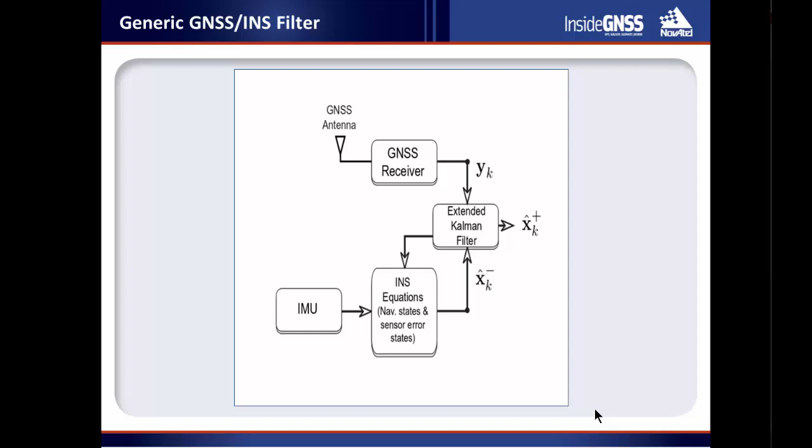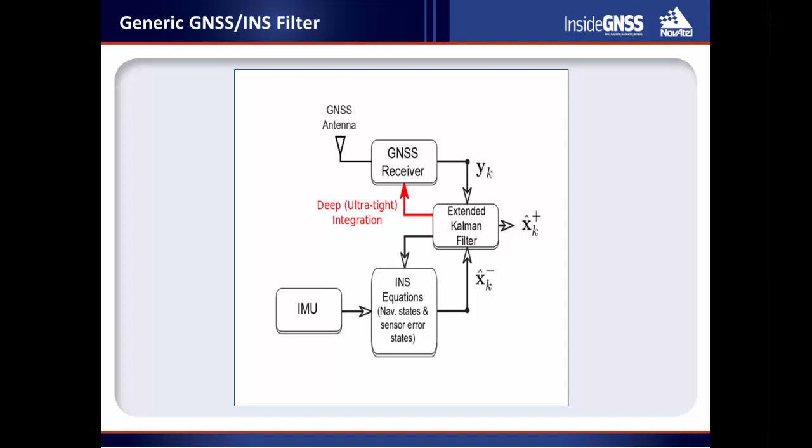And I think part of the problem why that question comes up is because we present the INS GNSS integration as shown on this slide here, where we have a block for the INS, a block for the GNSS, and some sort of a filter that blends them together. And it almost always looks the same. Sometimes there might be a slight variation where we have deep integration where the GNSS receiver is being aided by the filter outputs. But again, this kind of leads to the impression that all integration strategies are more or less the same for different applications. The fact of the matter, they aren't.

And what we're going to do in today's webinar is actually walk you through 2 case studies where you'll get to see the beginning to end process of designing an INS GNSS system. And you will get to see how the design requirements evolve and how they are different for different applications. The first one will be a GNSS integrated with a tactical grade inertial sensor for a high dynamic application. And the second one is going to be a GNSS integrated with a consumer or automotive grade or low quality

inertial sensor. And as we go through this webinar, what we hope you get out of this is to understand how the design and integration architectures and the design process are different for the different types of sensors used and different types of applications.

With that, I will go ahead and introduce our first panelist, Thomas Jekyll, who is a senior engineer in Honeywell's Sensing, Guidance, and Navigation Center of Excellence. He holds BS and MS degrees in aerospace engineering and mechanics from the University of Minnesota. Tom Jekyll's research interests lie in the area of inertial navigation, GNSS inertial fusion, and MEMS inertial sensor design for navigation applications. He has been involved in a wide range of navigation programs within Honeywell, from deeply integrated tactical navigation systems to safety critical GPS landing systems. With that, Tom, I'll hand it over to you.

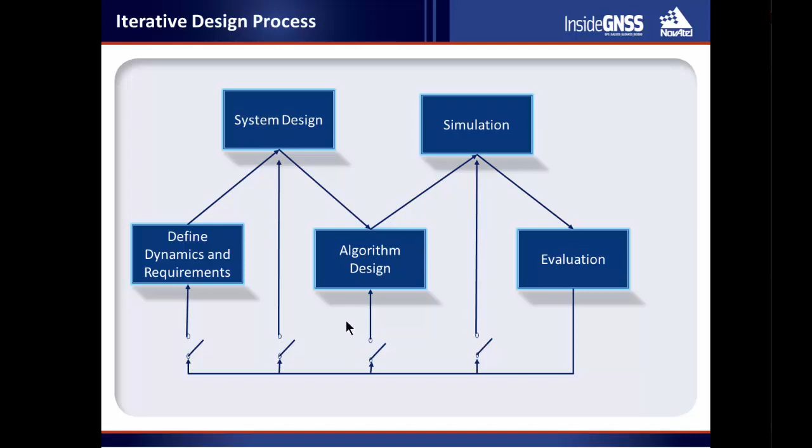So as indicated in the poll question by the majority of users, you can see that we have an iterative process here. So our goal is to define the dynamics and requirements, perform a system design, followed by an algorithm design, simulation, evaluation, and then feedback. And this feedback is especially important in designing navigation systems for high dynamic applications, since the performance is dependent on the actual dynamics involved. And I'll show that with a simple example for the inertial sensor selected for this design.

So first step, define your dynamics. You want to pick a representative trajectory or several representative trajectories, figure out the inertial forces, and since the example I'm talking about today is confined to strap-down navigation, it means sensors experience the full motion of the body with some attenuation due to how they're mounted, say by an isolator or otherwise, which is different than gimbaled navigation where the body is free to move.

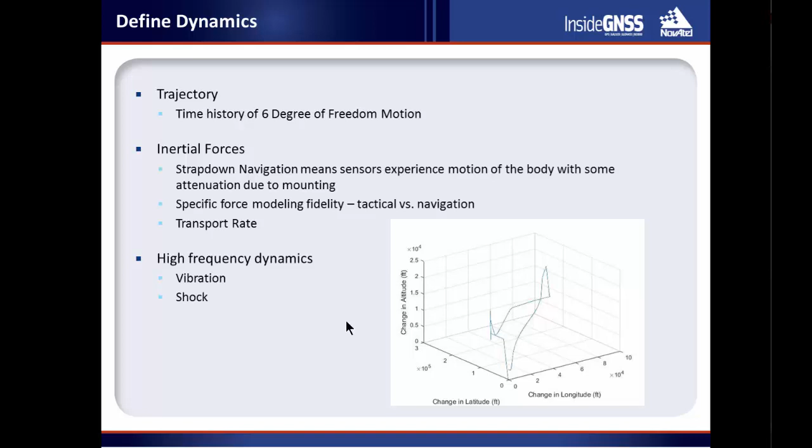And I'll talk about strap-down navigation specific force modeling fidelity. It's critical for navigation applications, but as you'll see in my error models, not so much in tactical, although it is something we still do consider. And since it's a high dynamic application, we also have to look at mechanizing the equations to include the transport rate since you're moving quickly. And other things to consider are high frequency dynamics such as vibration and shock. Those are considered high dynamics, and they do put the system under a certain amount of stress. So there are certainly requirements around surviving those.

So requirements: size, weight, power, and cost. In a lot of aerospace applications, size and weight are really key because they cause other parts of the system to have to cut weight, and you're trying to lift them up high, fast, far. So power can also be a constraint, and cost, generally not as much, but still an important consideration, especially with today's budget constraints that are going on.

And of course, given it's a high dynamic application, you want the dynamic range and bandwidth driven by your platform dynamics. So after you figure out your trajectories, you don't want to have the sensors not measuring the full bandwidth or the full dynamic range. So those are key requirements.

And then for performance, generally you first start off with navigation performance or something that's a little bit more easily quantifiable. The errors will be the focus of the first part of my talk. Work that into what are your actual inertial performance requirements and your measurement performance requirements given your trajectory and some tools that I'll discuss. And then of course there's always other considerations: reliability, technology readiness, and ease of adoption.

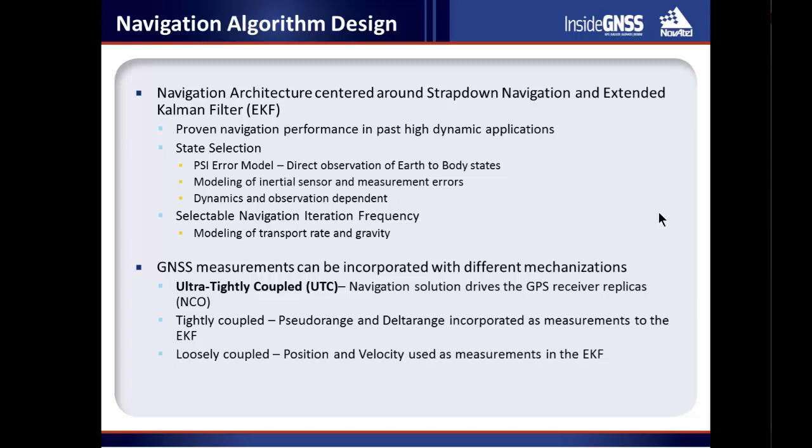So now we'll talk about one of the drawbacks of deeply integrated or ultra tightly coupled that can be overcome with a specific receiver design. These are really requirements around a receiver used for this type of application. It has to be able to accept NCO commands from external sources and output I's and Q's at 50 hertz or greater, and that is for signals with navigation data on them. Newer signals coming online without nav data should relax this requirement.

And the bias estimation and whatever corrections are made in the GNSS receiver should be consistent with what's going on in the Kalman filter, since when you go with a DI or UTC application, you combine everything into one filter, and anything else done in the receiver should be known in the central processor. Another requirement for us is small size, weight, and power. If we selected the small IMU and then put on a huge GPS receiver, that's going to be an issue. It kind of negates our reason for selection in the first place.

And then the next requirement is oscillator stability under dynamic conditions. So the oscillator G sensitivity should be at least consistent so that it can be estimated. As I mentioned before, the receiver only needs to track errors in the inertial solution and, of course, its own clock. And the signal acquisition time may or may not be critical, and I'll discuss that later with some performance results. That really depends on your requirements post initialization.

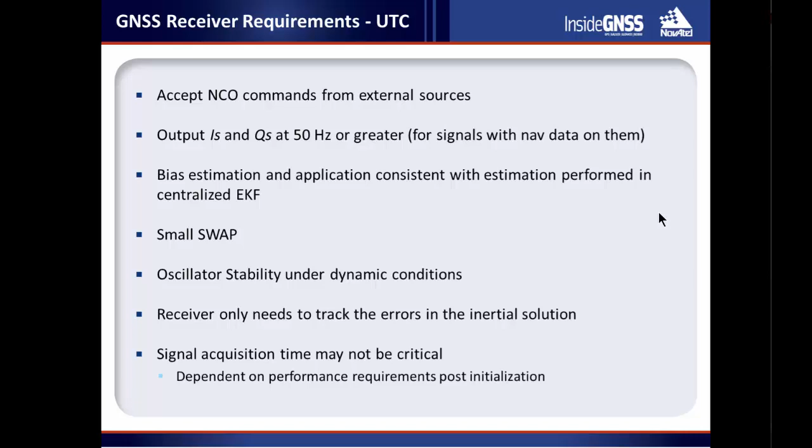So now I'll talk about, we have the INS, we have the GPS now, and we have the mechanization to bring them together. Now, specifics of how you select certain states in your extended Kalman filter. People generally use a covariance or a time domain simulation, and initially, before we really know what the algorithm design is going to be, start off with a covariance simulation.

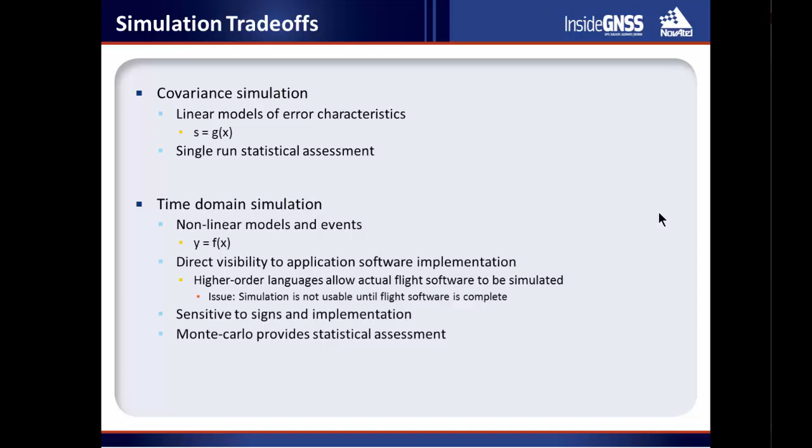That is, you have linear models of error characteristics and a single run statistical assessment, as compared to a time domain simulation where you are simulating your full algorithm, you're running it through, say, a Monte Carlo analysis and getting a statistical assessment, which takes longer for a given extended Kalman filter design. So the first thing we generally do is covariance analysis.

And so what you do is a covariance analysis, and really what you're getting out of this is the difference between a really high order filter with everything that you think should be included in the error model and candidate filters. So you're trying to select states that are going to be both observable with your measurements and observable by your dynamics.

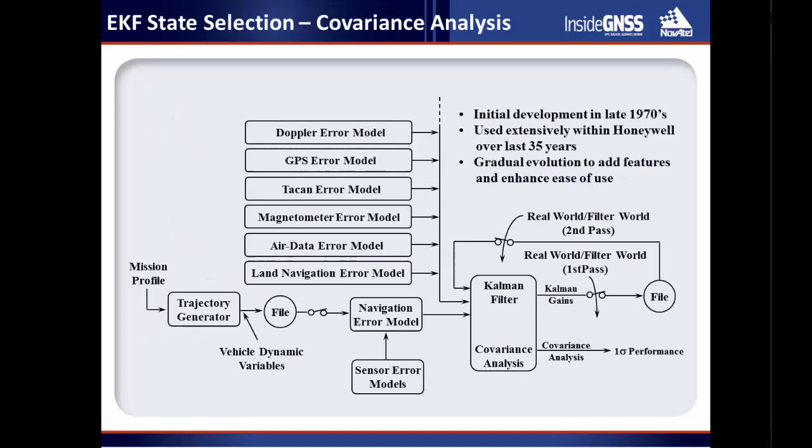So now I'll take you into a high dynamic environment, say an example of estimating a state. So the gyroscope scale factor is a common state that needs to be estimated in these high dynamic environments, and I'm going to visit the case where you do a 180-degree roll, like that aircraft rolling over on the introductory slide. So if there's no state in the extended Kalman filter, and you have a scale factor from our specification of 1,000 ppm for the AA50. So if we go back up for our HG1930 AA50, you'll see that the scale factor repeatability 1 sigma is 1,000 ppm.

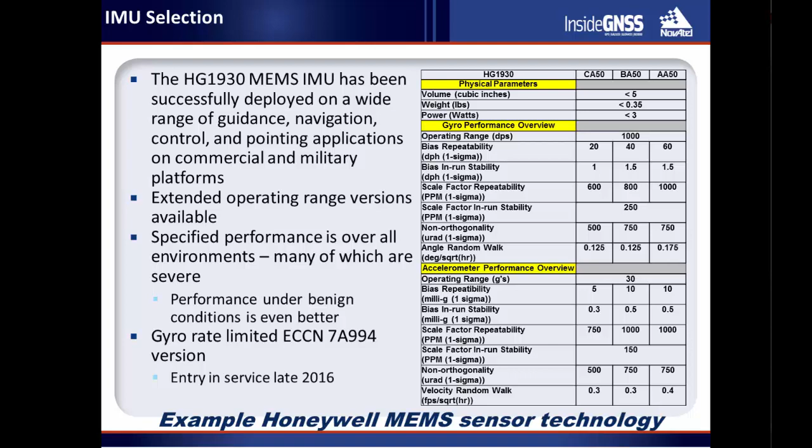Then you're going to get an attitude error for that roll of 0.18 degrees because you've rolled over 180 degrees, and you have this error in parts that causes that attitude error. Now, because of that, you're going to misresolve velocity for dead reckoning, so you're going to get this much error in your solution.

Now let's say you've estimated the state in your extended Kalman filter, and generally you can estimate to a little bit better than the in-run stability depending on dynamics. So you can estimate to the in-run from the AA50 spec, and the in-run is 250 ppm, so your attitude error becomes 0.05 degrees, and your misresolution of velocity for your dead reckoning becomes much, much smaller. So modeling that error really provides performance benefit when you are going to do these maneuvers consistently. And of note is you have to have the trajectory to allow it and the measurements to allow it.

So now I'm going to cover some more available states. Obviously, inertial states, you can model the bias of the sensors, the scale factor, as I just mentioned, any scale factor nonlinearity that's repeatable for the sensor, misalignment, non-orthogonality, and gyroscope G sensitivity, and some GNSS measurement states, clock drift rate, range bias, and oscillator G sensitivity. And of course, these states have to be repeatable and modeled as close to the real system as possible.

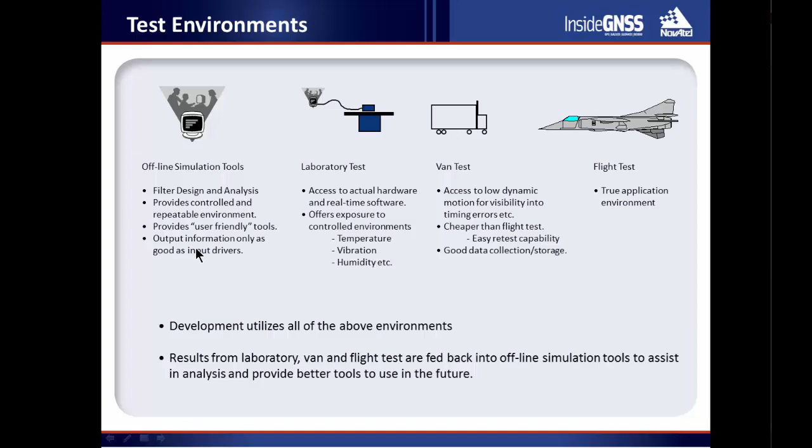And of course, when we get into a flight test, the reason you've designed your system so small is it's space constrained for the actual environment it will be in. So adding any other instrumentation takes money and time, so it's good if you've checked it out in the van test ahead of time. Then you take all that information you've learned from these tests and feed it back into your offline simulation tools to make a more complete model of your system.

And so I talked about the process, and now we'll talk about kind of the outcome of our design, and it's the HG1930N integrated navigator product. You can see it has the same form factor as a 1930. You can see it compared to a quarter here, and it's a drop-in replacement for any 1930 that exists. And the key here is flexible I/O options.

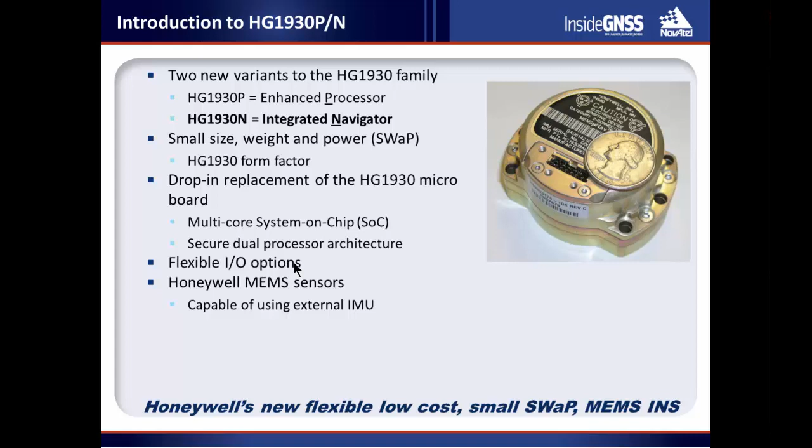So I talked about UTC and the need for feedback to the GPS receiver. So this has low latency ports. It's also capable of handling external IMUs. So if we get a system in that needs more performance, we can design to that. So what you can see in the system is the Honeywell IMU software, all the calibration, all the stuff necessary to get it to those performance requirements is running on one of the processors.

Then optionally you have the Honeywell navigation software, or it could be an external software, and it's in an open environment, and you can see it's communicating with UARTs, SDLC, and external I/O. That'll show on the next slide. So it's a 14-pin connector, and it's compatible with existing for volume, commonality, production, and cost. And so that has limitations because it's only 14 pins. There's certain systems that you want more pins to get more measurement sources, I mean, Doppler, stuff that I showed on the previous slides.

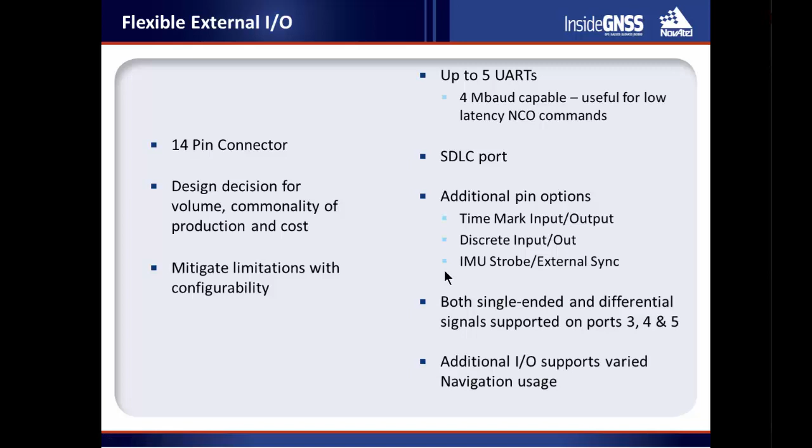So it has these ports that are configurable and capable of changing. For legacy programs, it has an SDLC port, and pin options to go to different time mark ins and outs to support different GPS receiver implementations. And so there's just various navigation usage you can use with this. So that gives us the flexibility that I talked about in the goals.

Now, system performance. So we went through the whole design, went through all the testing, and then fed it back into our simulation. So what you can see here is navigation performance is similar to the Honeywell BG1930, and I'll refer you to a reference at the end of my presentation. And so we initialize it with a certain amount of error, and we want to see that the transfer alignment measurements incorporated into the Kalman filter do their job and take it down to close to GPS level accuracy.

Obviously, the application is a UAS glider out on the wing of an aircraft that's being transfer aligned. So you have a master navigator that's providing position, velocity, and attitude updates, but you have the flexure of the wing relative to the internal bay, and then at some point the glider is going to get launched.

So you have a launch phase, and so for two different GPS receivers with a different time to first fix, you have different performance. So for the 20-second time to first fix, there's this performance. You coast free inertially there, and then at some point it recovers. And then you have a lower time to first fix, and of course the GPS receiver being unaided generally has closer to this, and aided is closer to this.

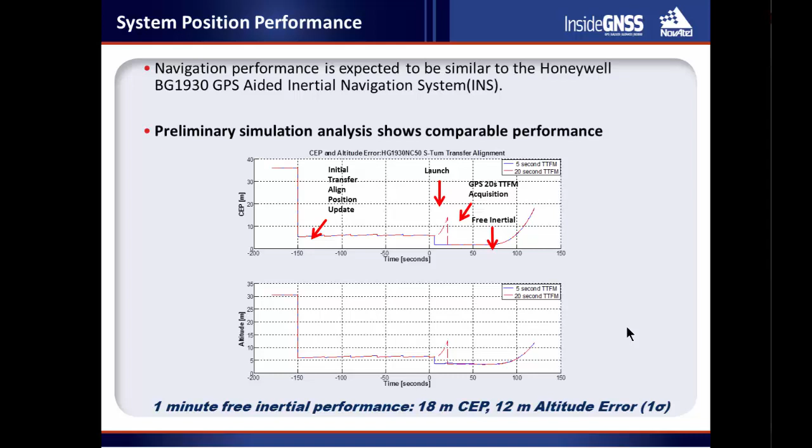And then you have some period where the unit is running with GPS measurements incorporated, and at some point you go free inertial. And so after 1 minute free inertial performance, you have 18 meters of CEP and 12 meters of altitude error, 1 sigma. So CEP is just think half the time it will go over that, half the time it will go under that error amount, and then altitude error is 1 sigma.

So future developments, I won't spend too much time on that.

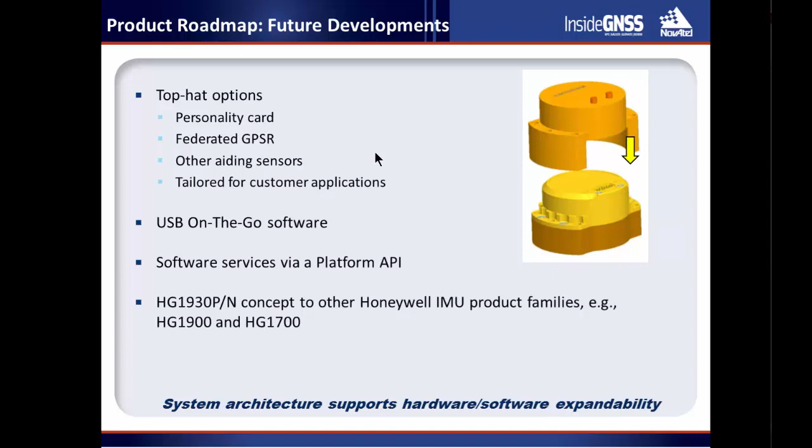We just have additional options to configure, put in a different GPSR, swap out other aiding sensors, do USB on the go, which means you can just plug it into a laptop. This concept is also being defined for other Honeywell product families, so this all supports a very configurable, flexible architecture.

So really what I want you to take away from this presentation is that when you go to design a system for a dynamic environment, it's an iterative process, that you have this trajectory dependence that you have to constantly work out and consider. And high-fidelity simulations provide a low-cost means to iterate on the design. So anytime you go back and you change requirements, you can hopefully, if your simulation is good enough, and we've proven in a number of cases that it is for certain requirements, you can go and simulate instead of having to go out and redo some of those costly van and flight tests.

And really modeling and knowing the sensors and understanding how they perform under dynamics is critical, because if your model doesn't match, your simulations won't match, and you won't be able to do that mapping that I talked about between your desired performance requirements and the inertial performance requirements needed.

I saw a lot of questions on what is ultra tightly coupling and how does it impact things. And one thing that should really be noted is that selection of ultra tightly coupled has a significant design impact when you're talking about GPS receivers or GNSS receivers, that your receiver and your inertial unit effectively become one, and there has to be significant communication and design modifications to the receiver to incorporate that.

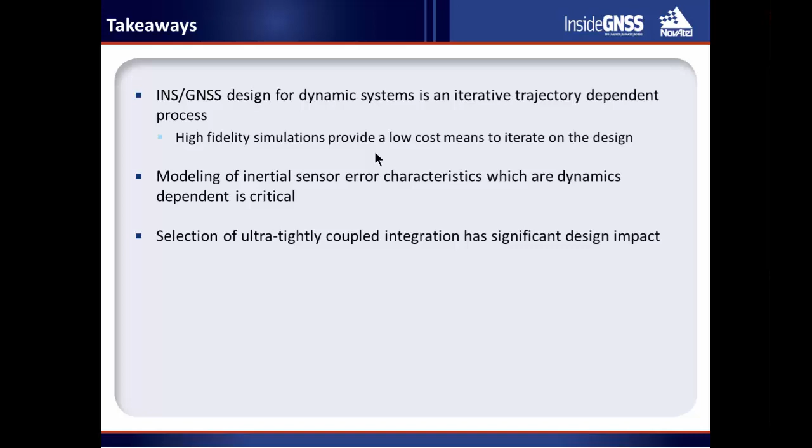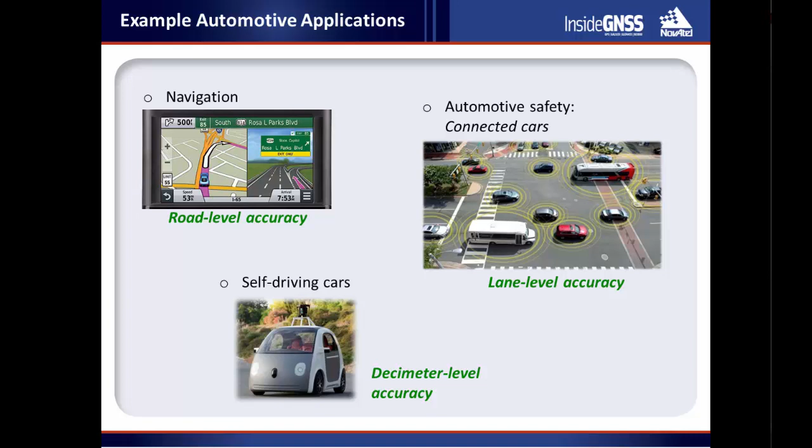In this case, the accuracy requirements become quite a bit more stringent, and they really want to have decimeter level of positioning accuracy to enable self-driving applications. So connected cars is something that will probably take place before self-driving cars.

It's based on vehicle-to-vehicle communication, or V2V, between two cars. They exchange the navigation information, position and velocity, to see if two vehicles are on a collision course and warn drivers if that's the case. So it's not an automated system per se.

The driver is still ultimately responsible for the final action, but the system is much more efficient compared to some of the existing safety systems, for example, blind spot warnings. It really enables you to see around the corner by exchanging the navigation information between two vehicles. There are a couple of examples on this slide where that system would be helpful.

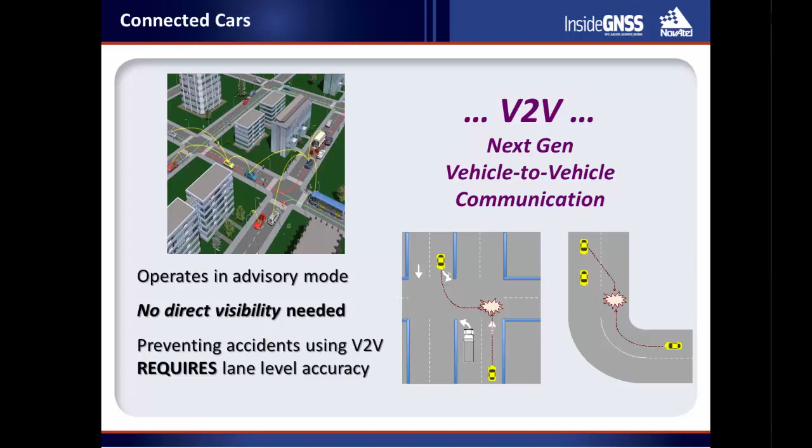For example, you want to take a left turn at the intersection, and there's a semi-truck, or even just another car, blocking your view, and you cannot see oncoming traffic. The connected cars V2V-based system would predict the accident and warn you so you don't make this unsafe maneuver. The requirement here is lane level accuracy.

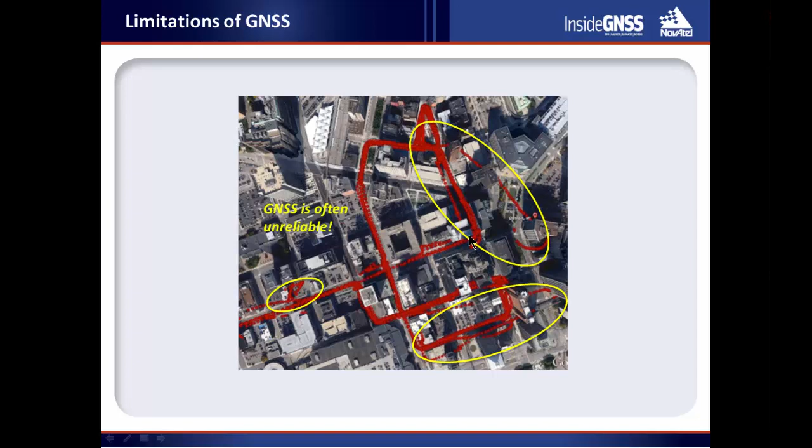As we all probably know, GNSS is a very useful system in open areas and can provide this desired accuracy level. But when we go into dense urban, downtown environments, GNSS becomes unreliable. Integration of GNSS with inertial is a potential solution. However, for this application, we have to deal with very stringent cost limitations, so we have to use very low cost sensors.

Consumer-grade inertial sensors. Here are the typical performance specs: 0.1 degrees per second gyro drift, or 360 degrees per hour, compared to the sensor quality Tom was talking about, around 1 degree per hour. Here we deal with sensors accurate at a level of 100 degrees per hour. Accelerometer bias is also not very good, 0.1 meters per second squared. So much lower quality sensors compared to tactical grade inertial sensors.

As a result, some things are actually getting easier in the system design. Specifically, strapdown navigation mechanization is easier because non-inertial effects and high-precision gravitational models don't have to be considered. Your sensor errors are significantly larger than those effects, so they become second order. I'll give you an example on the next slide of why you don't have to worry about non-inertial effects.

The inertial error model is also easier. You don't have to consider high order terms such as cross-axis sensitivity because they don't contribute much to the overall error budget. You can include them in your model and your Kalman filter design, but they're not going to buy you all that much. So in this case, it makes sense to use a simpler model.

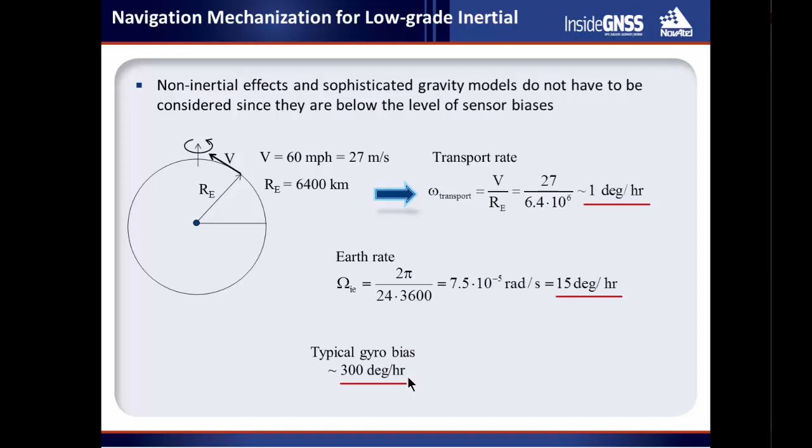Earth rate, sort of similar. Earth rate is 15 degrees per hour as compared to 300 degrees per hour gyro drift. It's not really worth taking it into account in your inertial mechanization algorithms. And this simplifies significantly the strap-down INS mechanization. So this is the typical strap-down INS mechanization that can be used with lower quality inertial sensors.

So you have accelerometers, they measure specific forces. You need to transform those specific forces from the body frame of reference into the navigation frame of reference using the attitude information, which is derived from your gyroscopes. Once you do the coordinate transformation, you need to compensate for gravity. And really, for low quality inertial sensors, the simplest gravitational model, assuming that gravity points strictly downward and the absolute value is 9.8 meters per second squared, is going to be sufficient.

You don't really have to use higher order gravitational models. Again, because your accelerometer bias is fairly large, it's going to overshadow this high precision gravitational model if you use it. So it's not really going to buy you anything. Once you've transformed your acceleration from the body frame into the nav frame and compensated for gravity, you do one integration into velocity based on initial conditions for this integration, and you do the second integration and you get your position output.

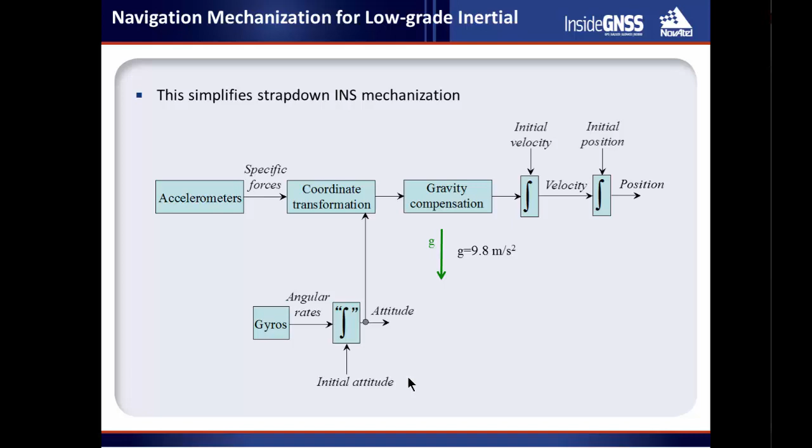One of the questions for low-grade, low-cost inertial sensors is if you cannot measure the earth rate, how do you actually do the initial alignment of the system? Because in the general approach for the initial alignment, you need to know at least two non-collinear vectors in the body frame and the navigation frame, and then you can align the angular orientation of the two systems relative to one another. So traditionally, you measure gravity with accelerometers and earth rate with your gyros, and you do the initial alignment. With the low-cost sensors, you don't have this luxury of measuring the earth rate based on gyro outputs. So you need to come up with a second vector.

For car navigation, this is relatively easy. You just use the velocity vector. You can measure it in the navigation frame of reference using GNSS, and you can assume that your velocity vector in the body frame of reference is aligned with the forward axis of your car. So you have two vectors. Gravity, you can always measure even with the lowest quality accelerometers, and you have the velocity vector, measured based on GNSS in the navigation frame, and you assume your car moves forward, so your velocity vector is aligned with the forward axis of the body frame. So you have these two vectors, and you can follow the same general approach for the initial attitude alignment as with more traditional inertial systems.

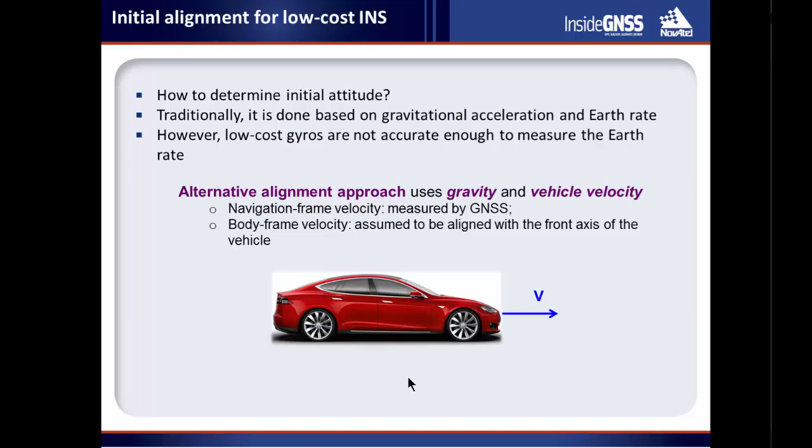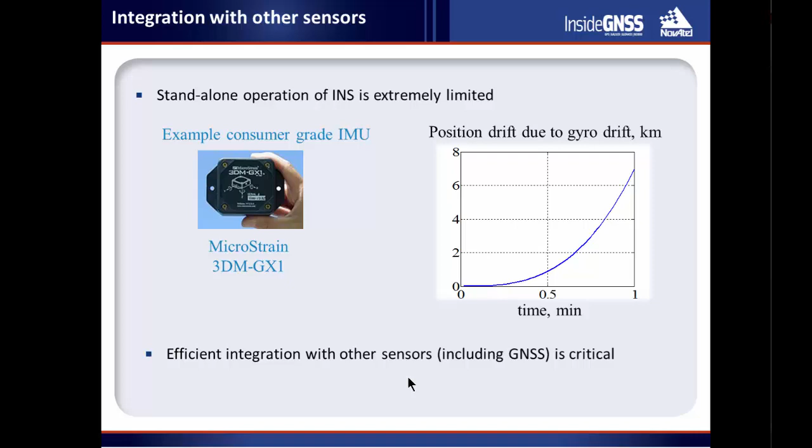So as I said before, the navigation mechanization in this case becomes significantly easier, but the role of aiding sensors is much more critical as compared to higher grade inertial systems. And this is why. This slide shows an example of a consumer grade INS and the position error drift after just 1 minute of standalone inertial operation. And this is only the contribution of the gyro drift into the overall position error. So you basically have about 7 kilometers of drift after 1 minute of standalone operation. Tom was showing you figures with 12 meters after 1 minute. Here we're looking at 7 kilometers. So you can't really coast on standalone inertial in this case. And you need efficient augmentation with other sensors, including GNSS, but not necessarily limited to GNSS.

When we're talking about GNSS inertial integration, what's the right integration mode? There are generally 3 integration modes, and it's generally accepted that there's loose integration, tight integration, and deep integration. What loose integration does is fuse measurements from GNSS and inertial at the solution level. So if you have a solution from your GNSS, great. You can use it to reduce drift in your inertial navigation outputs and make sure the INS doesn't drift all that much. But if you don't have the solution, you have a problem. You basically go into coasting mode on your inertial. And as we saw on the previous slide, you can't really do it for a very long period of time.

Tight integration is fusion of navigation measurements. Even though you may not have enough measurements to produce your GNSS position fix, tight integration still gives you some information to at least partially reduce drift in your inertial navigation outputs. And deep integration is really integration at the signal processing level. Tom was talking about deep integration, and I'll talk about it a little bit more in a few minutes. So really, when we're looking at the integration of GNSS and inertial for land vehicles in GNSS challenged environments using consumer-grade sensors, loose integration is not really the best option. Again, this is an example with some actual data from an urban environment.

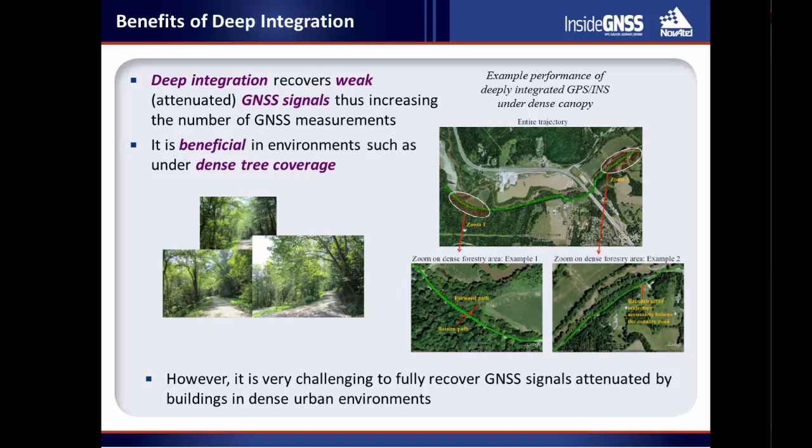However, when we're talking about urban canyon navigation and signals attenuated by buildings, I personally think it's extremely challenging to reliably recover GNSS signals attenuated by buildings. So deep integration in this case probably has fairly limited value.

So when we're talking about integration of inertial and GNSS, which GNSS measurements do we want to use? There are pseudoranges and there's carrier phase. So if we look at the precision of carrier phase versus pseudoranges, carrier phase really provides you 2 to 3 orders of magnitude in noise reduction as compared to pseudoranges. The typical noise sigma value for pseudoranges is at a meter level. When we're looking at the carrier phase, it's sub-centimeter, even millimeter level.

And what it buys you when you integrate with low-quality inertials, it really significantly shortens the noise averaging interval. Essentially, it makes inertial errors observable instantaneously to the filter. So you don't really have to apply a lot of noise averaging because the carrier phase measurement is so precise. And the longer averaging interval required for the case where you use pseudoranges is really not very efficient, especially for very low quality inertial sensors.

And the reason why is because inertial errors are not very stable. They're changing over time fairly quickly. So when you're waiting for your pseudorange noise to average down to the level where you can efficiently apply it for inertial error estimation, those errors are changing. So they may have already changed quite a bit. So it's not a very efficient scheme. Again, the use of carrier phase is especially beneficial for integration with low-grade inertial sensors.

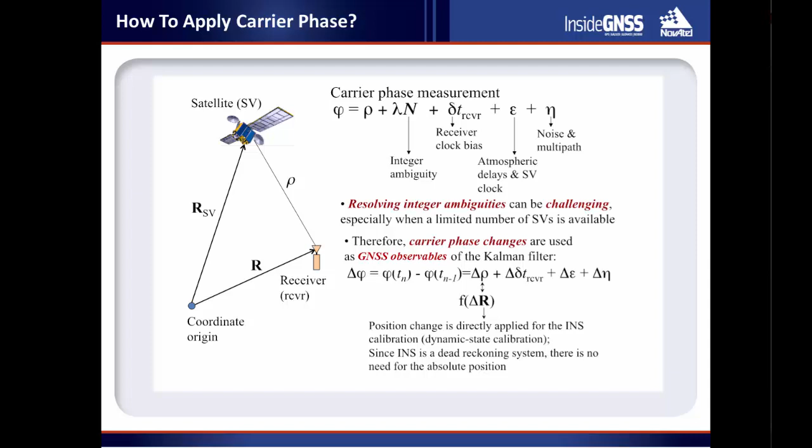Well, luckily, we can difference carrier phase measurements over time. We're going to lose absolute position information, of course, by doing this difference, but we're going to keep relative position information, or position changes. And inertial is really a dead reckoning system, so it doesn't provide you absolute position information. All the information about the error state propagation is essentially incorporated in this position change. And of course, when you do temporal differencing of the carrier phase, the integer ambiguity term is eliminated.

So the measurement quality check is also a very important aspect of the system design for land applications in GNSS challenged environments. Multipath, and specifically non-line of sight multipath, can degrade your performance significantly, so you need to do something about it. There's a relatively straightforward approach. You can do RAIM, Receiver Autonomous Integrity Monitoring, but the drawback of RAIM is that it generally assumes a single failure mode. So in the case where only one satellite channel is affected, it's okay, but with multiple channels affected, it has limitations. So GNSS/INS integrity monitoring is a much more efficient approach.

So essentially, you predict what the GNSS measurement should be based on the inertial. You compare it with the actual measurement, and if the difference is beyond a certain threshold, you just don't use this measurement. And when you're working with the carrier phase, it's actually fairly efficient, specifically for multipath mitigation and for mitigating or excluding non-line of sight multipath from your solution.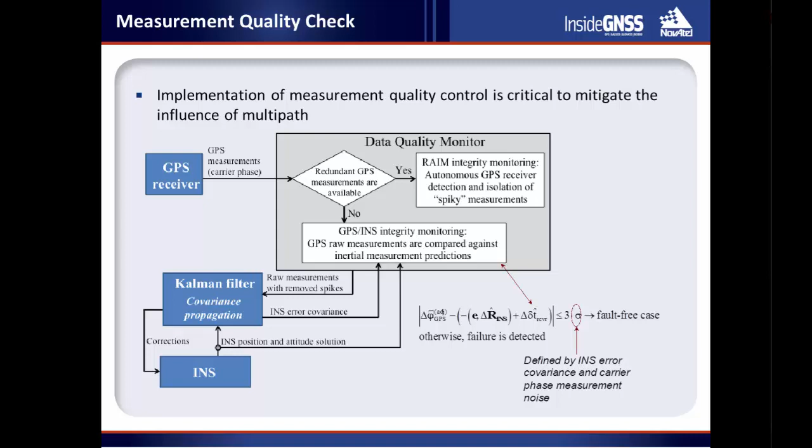Addition of other sensors. GNSS/INS integration, I'll show you some test results, is definitely much better than GNSS alone, but still has its limitations. So for land applications, for connected cars, for navigation, and for self-driving cars, if you want to go to urban environments and GNSS challenged environments, most likely you will need to add other sensors to the picture. But the good news is that modern cars have a lot of navigation-related sensors. They're not there initially for navigation-related purposes, but they can be fairly efficiently utilized for navigation. For example, there's a video camera, radar, odometer. You can use these sensors to further improve the performance of your integrated GNSS inertial solution.

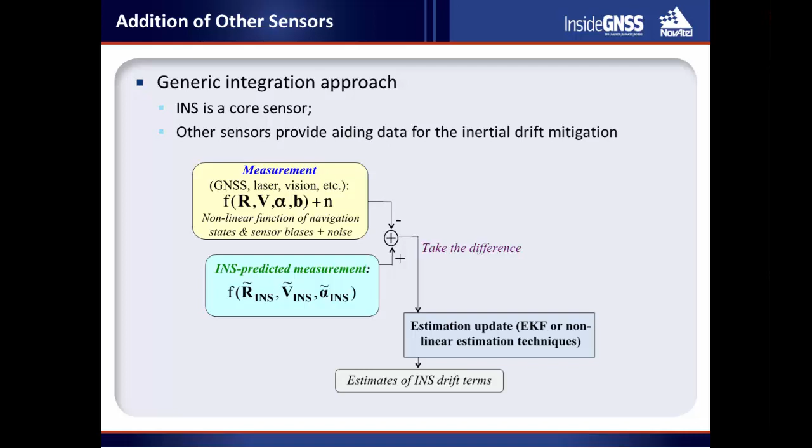Addition of other sensors: the generic integration approach is very similar to the GNSS/INS integration. Essentially, you're looking at the complementary filter design, what Tom was describing for his application, and you have a measurement from your aiding sensor, GNSS, vision, or something else. You have a prediction of this measurement. You take the difference and you apply it as a measurement observable to your extended Kalman filter.

But we include other sensors in the picture as well. There's a monocular video camera and also motion constraints. So let me explain a little bit about the motion constraints.

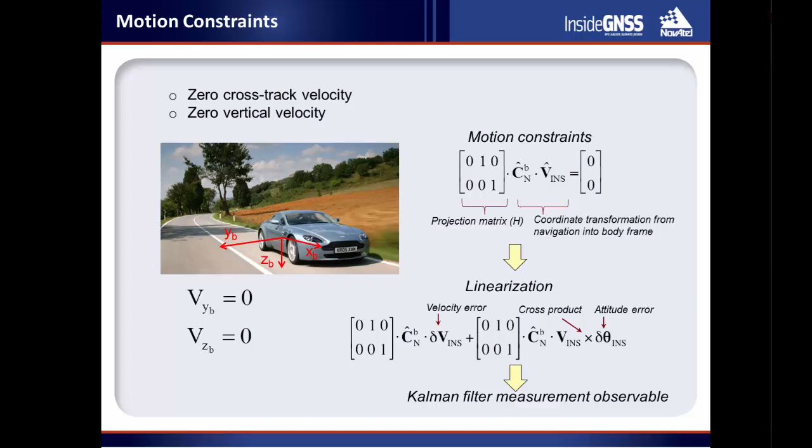It's not really a sensor, so it comes for free. But for automotive applications, you can assume that in the body frame, your vertical velocity and your cross-track velocity are 0, and incorporate those constraints essentially as additional measurements into the Kalman filter.

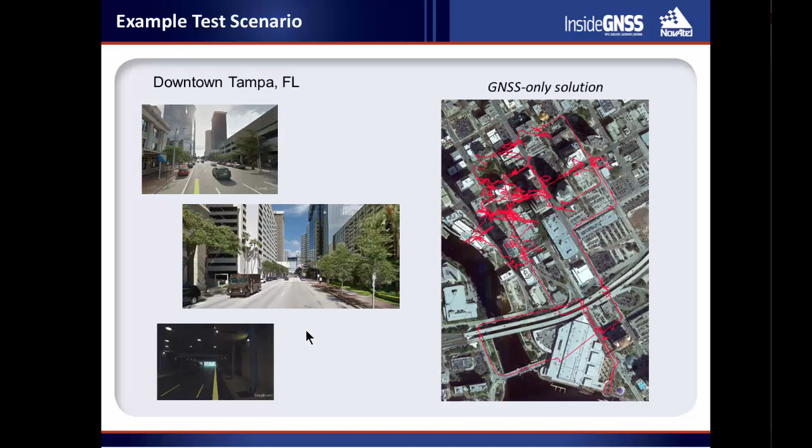So this is an example test scenario in downtown Tampa, Florida, not necessarily your wildest urban environment, but it has some fairly difficult environments from the navigation perspective. Specifically, there's this underground tunnel and some urban canyons as well in the picture. If we look at the GNSS only solution you see on this plot, when we go into denser environments, it doesn't look very good.

So when we add inertial into the picture, it definitely performs much better, especially if you look at the overall solution, but there are still some problem areas. For example, going out of the tunnel, there's definitely a very big jump in the solution on the order of probably 20, 30 meters. And looking at this plot here, the solution didn't converge right, so it's really estimating us somewhere in this parking lot here, where we actually drive on the road. So much better than GNSS alone, but still has some limitations.

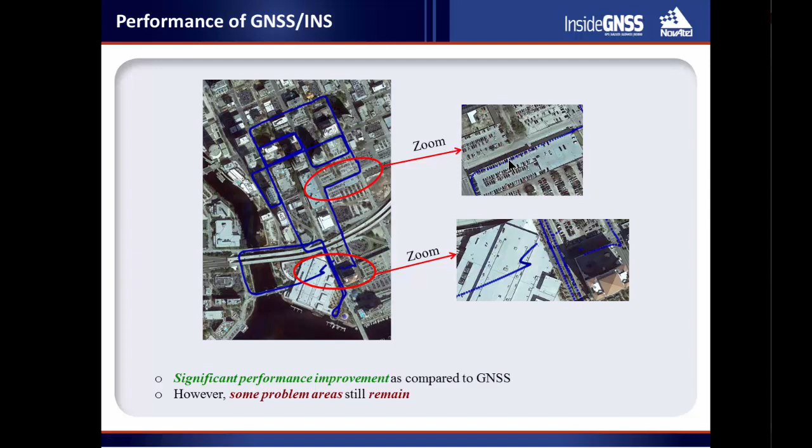So in conclusion, just a few takeaway points here. Integration with low-cost inertial sensors really allows simplifying the inertial navigation mechanization error propagation model, but the proper use of aiding data becomes much more critical. You want to use carrier phase; it's most beneficial for mitigating inertial error growth. GNSS inertial by itself still does not support very accurate navigation capabilities in challenging environments such as urban canyons. But when you augment it with other sensors such as motion constraints and video cameras, then accurate localization becomes possible for all driving scenarios. And that's all I have.